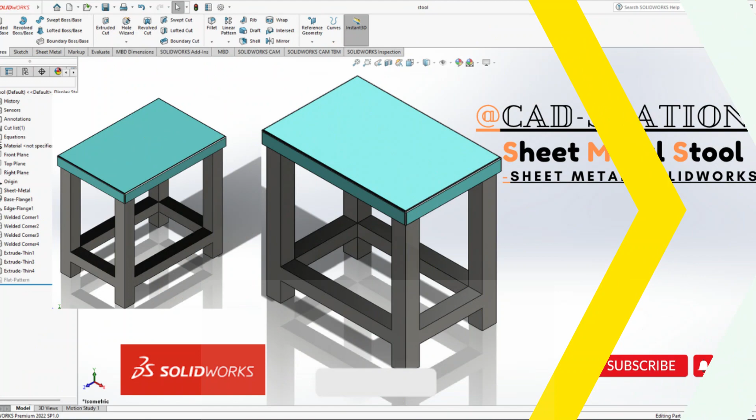We are going to make a stool using sheet metal and extrude boss base. Let's start. First of all, change unit from millimeters to IPS system.

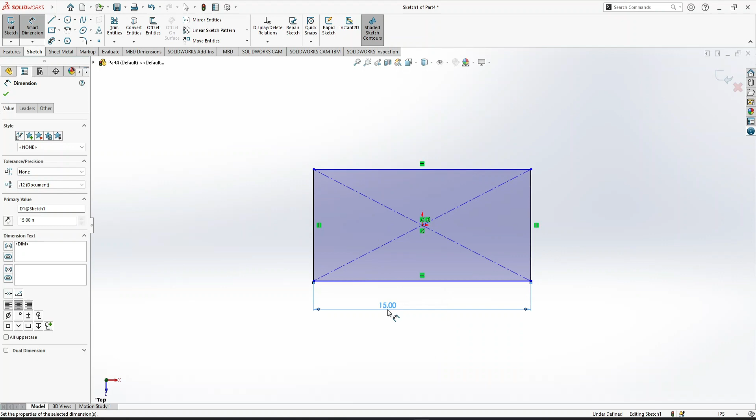Now I'm going to select the top plane, sketch, and select the center rectangle. From the origin, make a center rectangle of 18 inches by 12 inches, that's 1.5 feet by 1 feet.

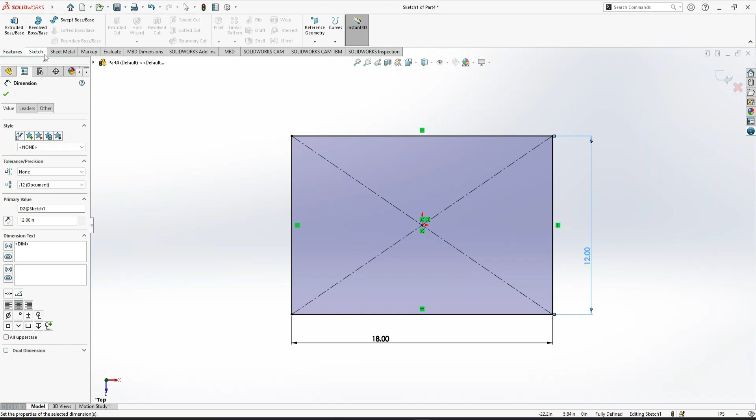So it's a rectangle. Now features, sheet metal. We are going to convert it into sheet metal base flange, and the thickness is going to be 3mm, equivalent to 0.118 inches. Press enter. Now it's converted into sheet metal.

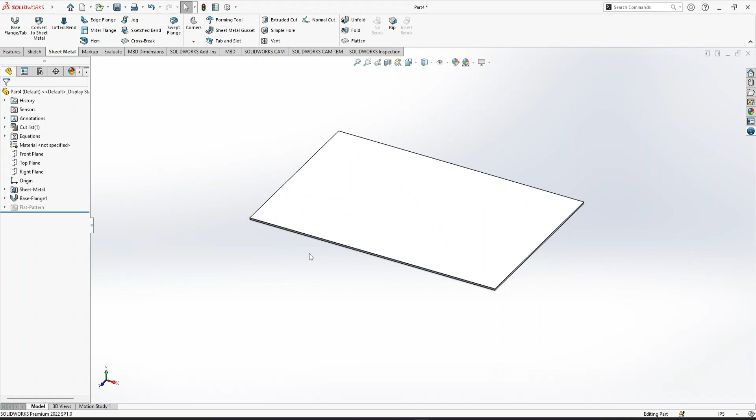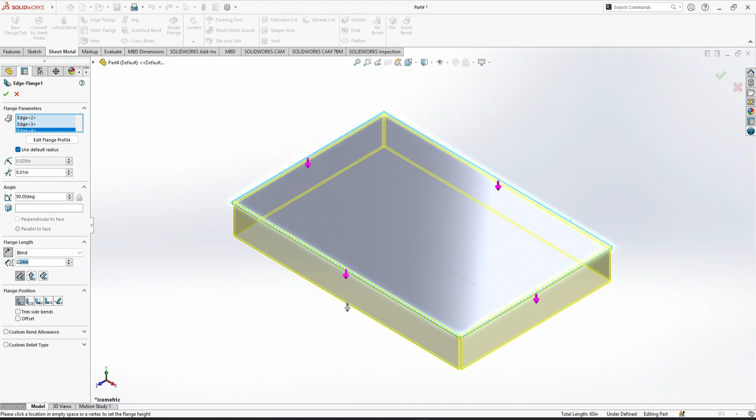Control 7 for isometric view. Now I want to make the edges here, so use edge flange. Select one of the edges and downward. Here also the third one, and this is the fourth one, and its height is going to be only 1.5 inches, and that's all for it.

Okay, all are done, but now you can see there's a gap, so we want to weld it. So we have the option from sheet metal tab, and the corner here is welded corners, so we are going to use it. Select one of the faces only and it will show you.

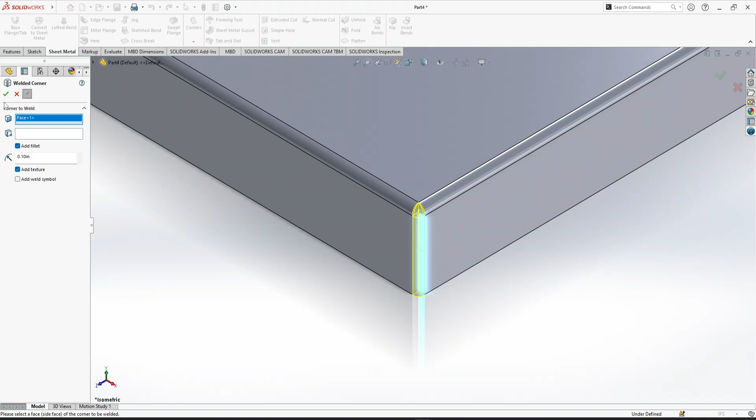If you want to add the texture, you can take it, or if you don't want to show, you can see there is a difference between the sheet metal and the welded part. So that's all. Now we are going to select this face. This one is going to be welded.

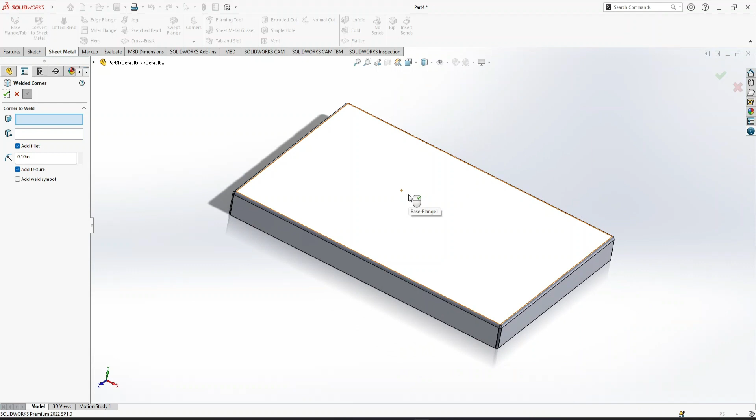Okay, now control 7 and rotate it. Here. Okay, and the last one, we have the last corner here, and it's going to be welded.

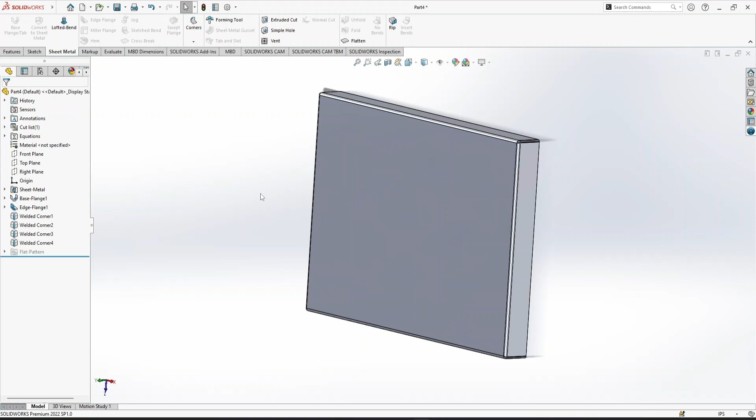Okay, now all the four corners are done. Control 7 for isometric view. This is the top side of our stool. Now we have to make the legs.

For this, I'm going to rotate it from the bottom side, sketch, and now center rectangle. From the origin, make a rectangle with smart dimension from here to here. Distance is 1.1 inches.

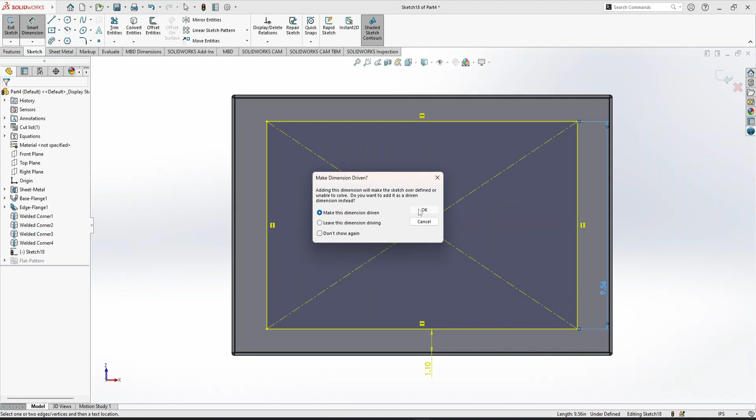From here to, okay, wait a minute, I have made the wrong click. From here to here is 1.1 inches, because we are going to make the legs of 2 inches. One more thing, select the whole rectangle and make a relation for construction.

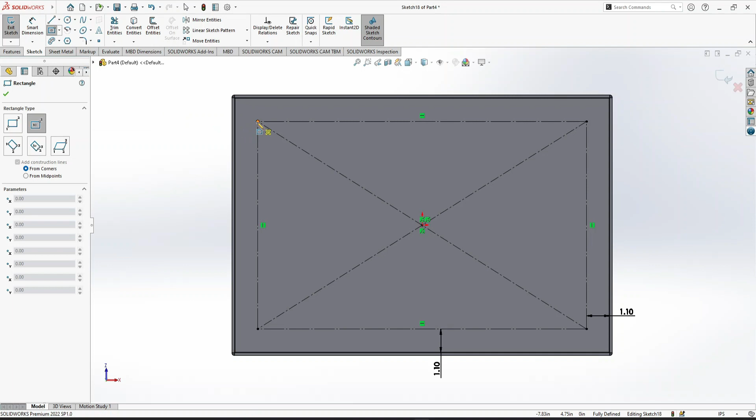Now it's simple. Select the center rectangle. From these edges, make 4 rectangles, just randomly. Okay, all are done. Now escape.

Select all the bottom lines, 1, 2, 3 and 4, and make a relation equal. Now next is the vertical lines, 1, 2, 3 and 4, and make a relation equal. So that's now easy for us.

This is going to be only 2 inches, and this is going to be 2 inches. Okay, now all the 4 are done. Control 7 for isometric view.

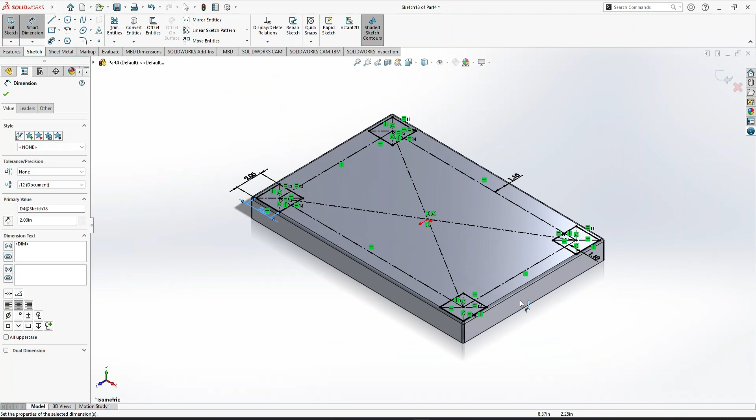Now we are going to extrude it. Features, extrude boss base, and this I am going to make of 18 inches height. Control 7, 18 inches height.

And one more thing, let me show you. If I just click OK, now you can see this is solid legs, but if I made the legs of solid iron bars or any metal bars, it will become more heavier. So I want to make it of pipes, so I can convert it into pipes.

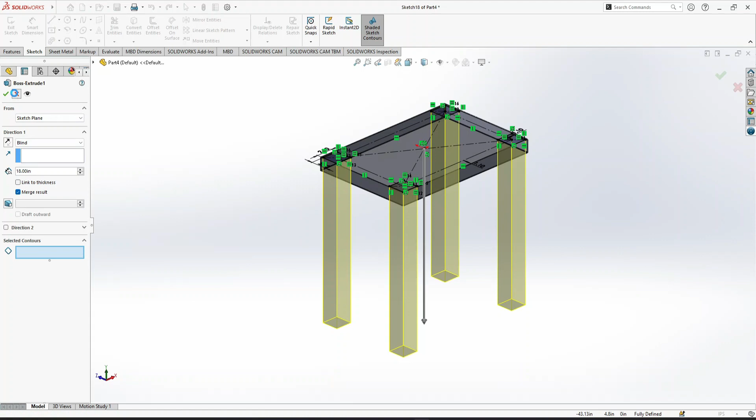First delete this. Okay, let it delete, add a sketch, and now we are going to features, extrude boss base, control 7 for isometric view. Thin features, you have the option thin features, and this is also going to be 3mm thickness.

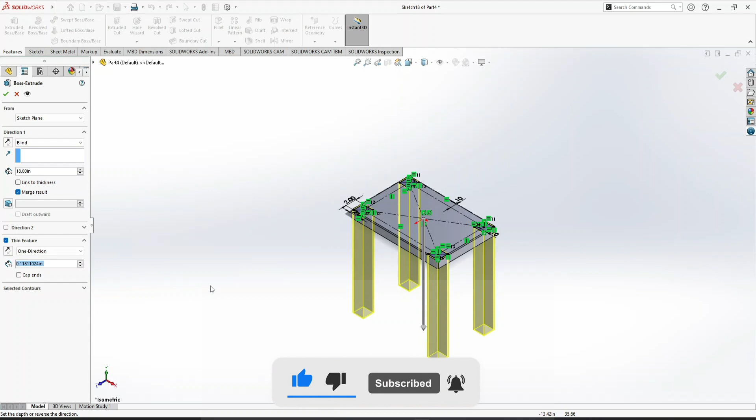That is equivalent to 0.118. Okay.

Now our stool is complete, but let me show you. This is like the pipes that we have used to make the stool.

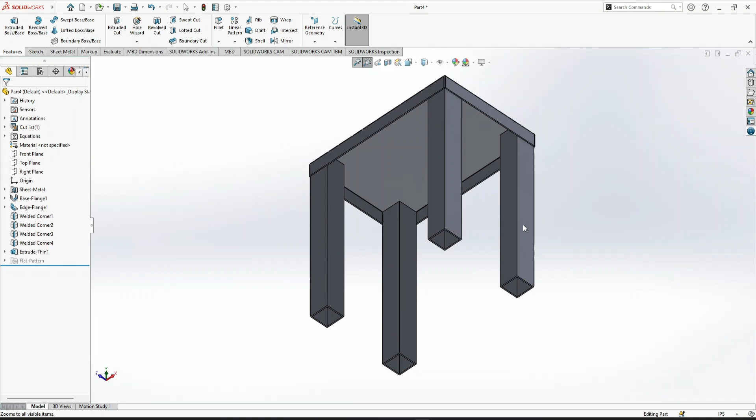Now if you have a chance to see the stool, you can find a support pipe that goes from here to this leg, from here to this leg, that supports the whole legs to stand properly. So we are going to make that pipe.

Select one face, sketch. This time we are going to use the corner rectangles. From any corner, make a rectangle here and here. Okay, now one more thing, select this one and this one, and it's going to be collinear.

Smart dimension from here to bottom. Okay, wait a minute, what's going on today? Delete this smart dimension from bottom to our pipe. Distance should be 2.5 inches.

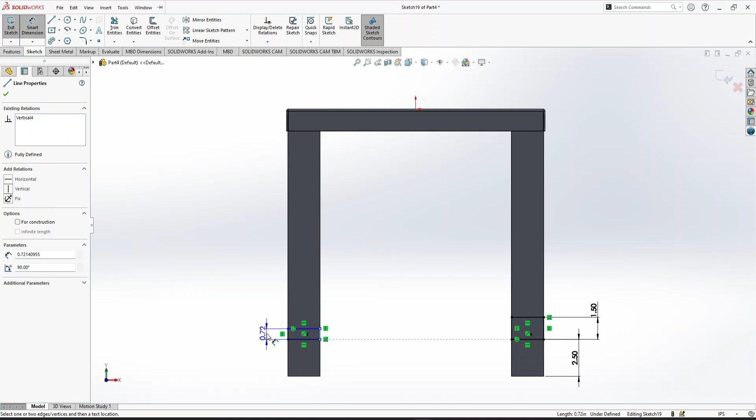This pipe is going to be the same, 1.5 inches width, and similarly this one is also going to be 2.5 inches. Okay, let me fix that, it's 2.5 inches. It's also going to be 2.5 inches.

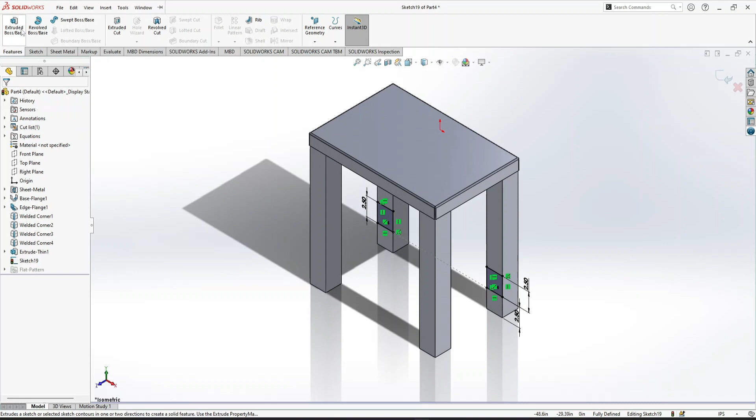Now control 7 for isometric view. Features, extrude boss base, and up to the next, thin features. Similarly 0.118, that is going to be the thickness.

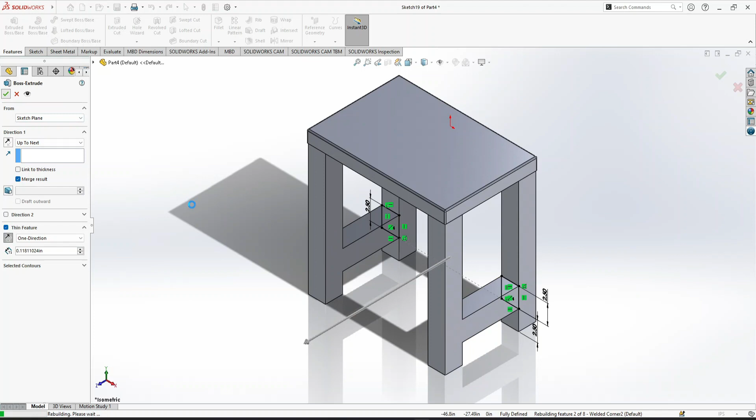Okay, one more thing, for thickness you have to again click on this double arrow. Okay, we have done this one.

One more thing, let me check. These pipes are of 2 inches, and I have made them as 2.5 inches. That's why it looks a little bit more wider.

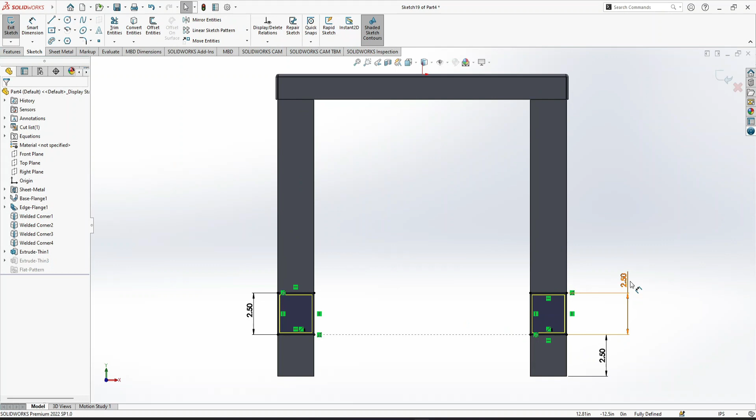So thin features, edit sketch, and it's going to be 2 inches, and this is also going to be 2 inches. And now that's done. Control 7 for isometric view.

Now we have to make from here to here. So select the face, sketch. Again, corner rectangle from here, make a rectangle here from here to here.

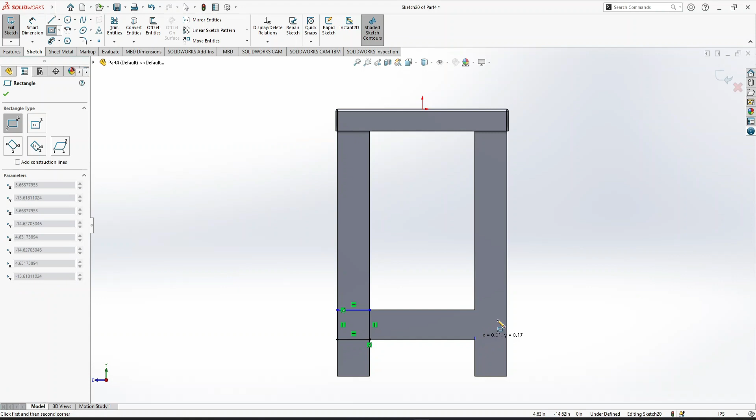Okay, this time I'm going to select this one, this line, and this line. All are going to be collinear. Okay, features, extrude boss base, all are going to be same thin features, up to the next, this arrow.

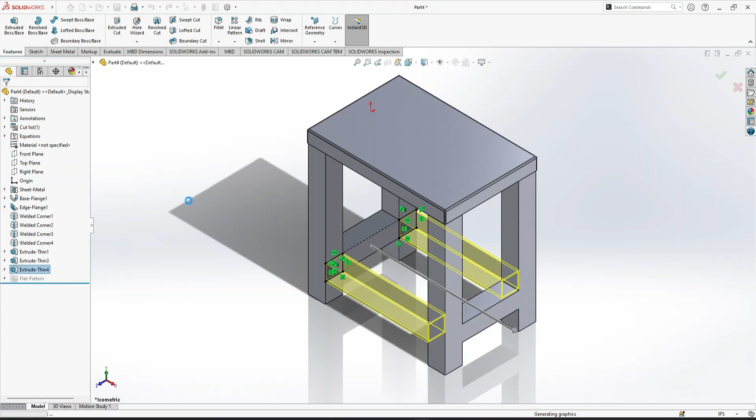And okay, and now our stool is ready. Control 7. Okay, it's already done. Control 7.

Hope you will like how we are making it. Now you can change its appearance.

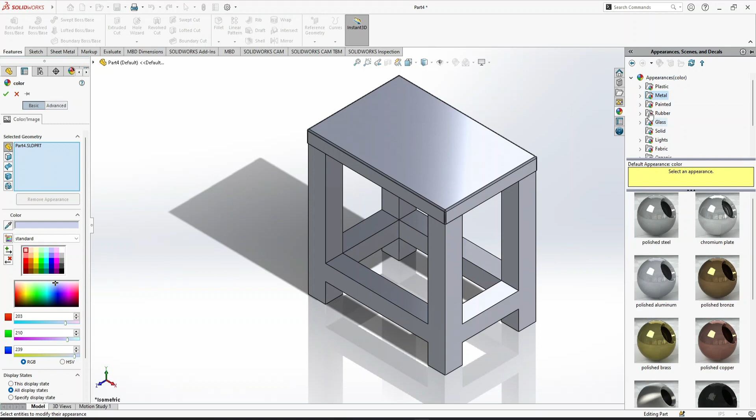Okay, one more thing, first change it's of metal, and in metal, let me select first mm, the sheet metal, that is base flange and edge flange, and it's going to be made of polished steel or chrome chromium plate.

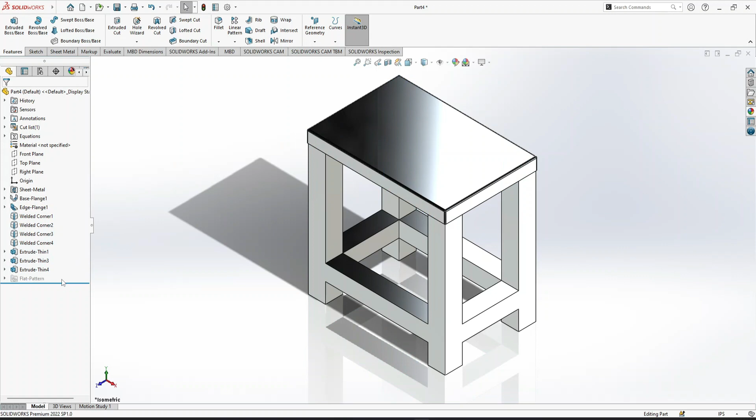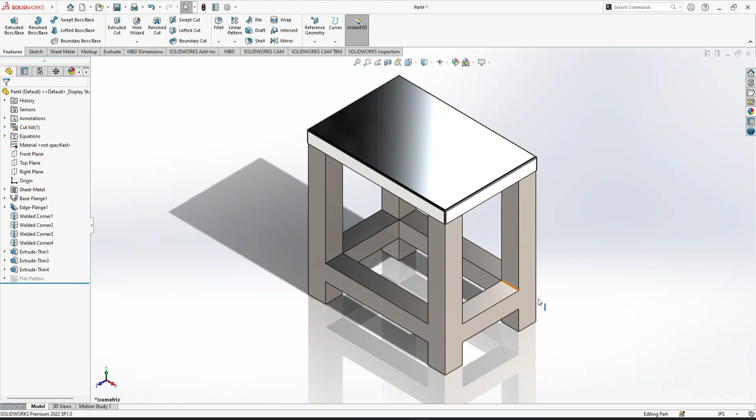Okay, and the legs are going to be off. Okay, legs are okay, but I want to change its color.